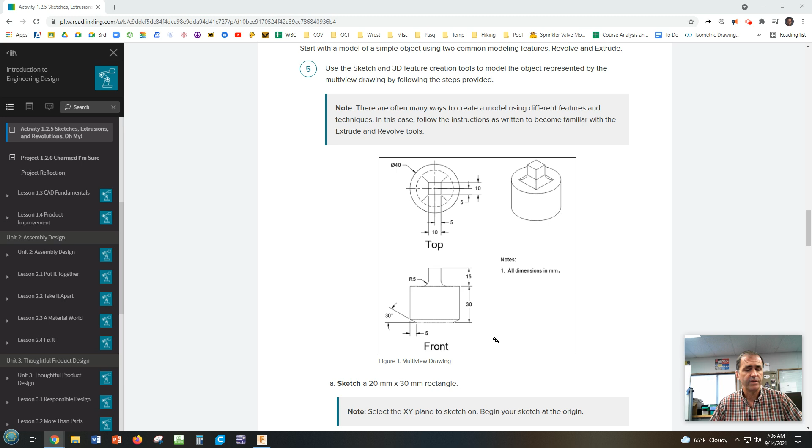All right, here we are in number 5. This is where we will start in activity 1.2.5 in the MyPLTW IED course. So we're going to create this object in Fusion. Now it starts by saying to sketch a 20 millimeter by 30 millimeter rectangle, which might seem odd, but what we're going to do is create this with a revolve, creating basically half of this biggest chunk here to make it.

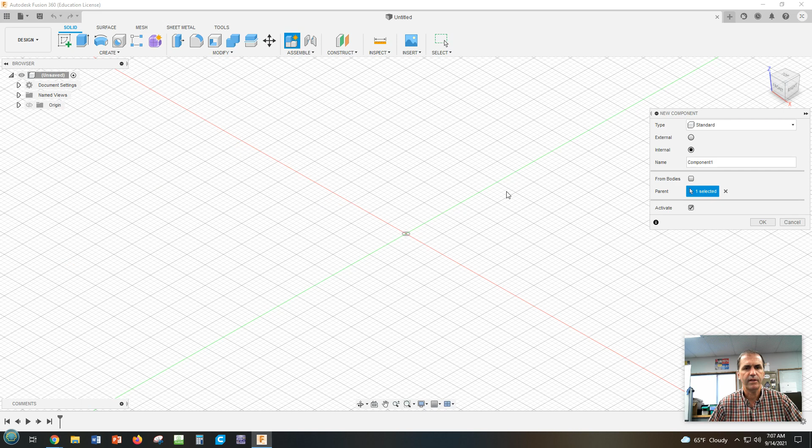Now, as we start this, remember that this video is designed for you to pause and go along with, not try and memorize. Go ahead and get into your Fusion account, make sure that you are in your practice folder, and we're going to create a new component. Just get in the habit of doing that. Click OK over here, and we are now in that environment.

We need to start a sketch. Now, remember this said we want to sketch on the front here, so you can choose either this plane or you can choose, I like clicking on the view cube. And we are now sketching. Now, as long as you do this before you start sketching anything, we can go to document settings. Right now I'm in inches.

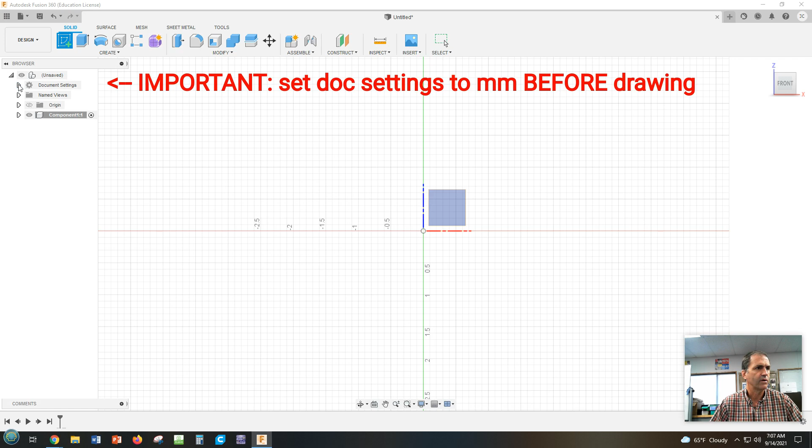I want to set that to millimeters because I believe, let's make sure, yes, that those dimensions are in millimeters. And now we're in our millimeter unit. So we're going to create a 20 by 30. It needs to be 20 high or 20 wide by 30 long, and it'll all become apparent to you soon.

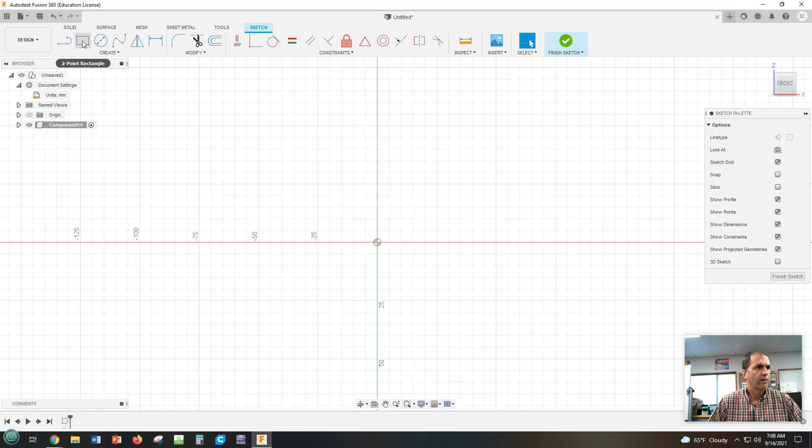2-point rectangle. We're going to hook on to the middle and pull outwards. Okay, so now I want that to be, remember you can tab back and forth. So I want the width to be 20, tab to the other one, and the height to be 30. Now you should have black lines. That means we're hooked up to here and we've defined the shape of this thing.

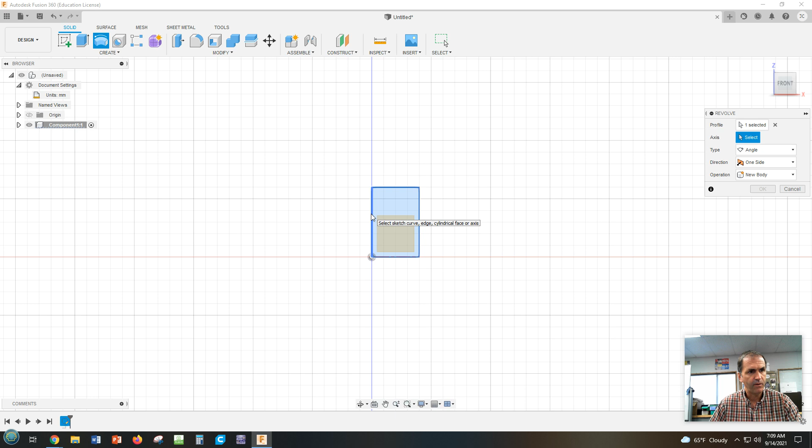Our next step says that we are going to finish the sketch and then revolve the rectangle 360 degrees around the 30 millimeter side. Let's do that. Finish sketch. We're now going to use a different tool. We've been using extrude, we haven't used revolve yet. So revolve is just an extrude that goes around an axis. I'm going to click revolve. We want that shape, it's already highlighted, and we're going to choose this edge right here. And notice that it revolved that shape around the edge. Click OK. Shift button and so on to kind of move it around, take a look at it. So we've got that basic cylinder.

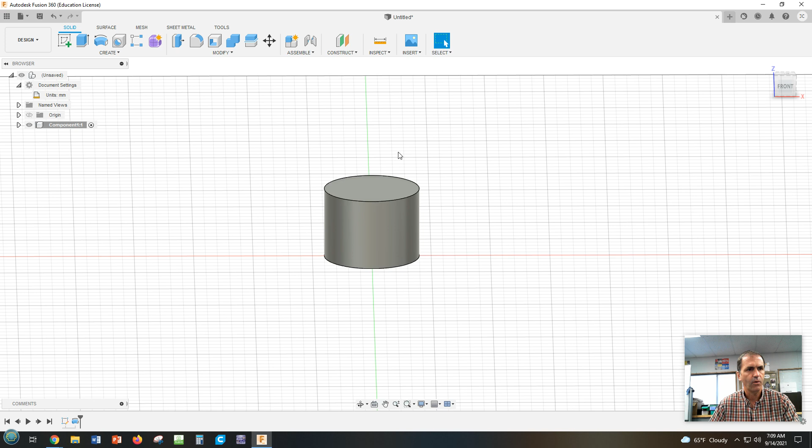All right, next it says to sketch a 10 millimeter square centered on top of the cylinder, finish the sketch, and extrude the square 15 millimeters. So we're going to sketch up here, 2 ways to do it. I can say sketch here, or I can right click here and say make a sketch there. I think I'll right click on that surface and create a sketch, which brings that perpendicular to our vision. And we're going to make a rectangle.

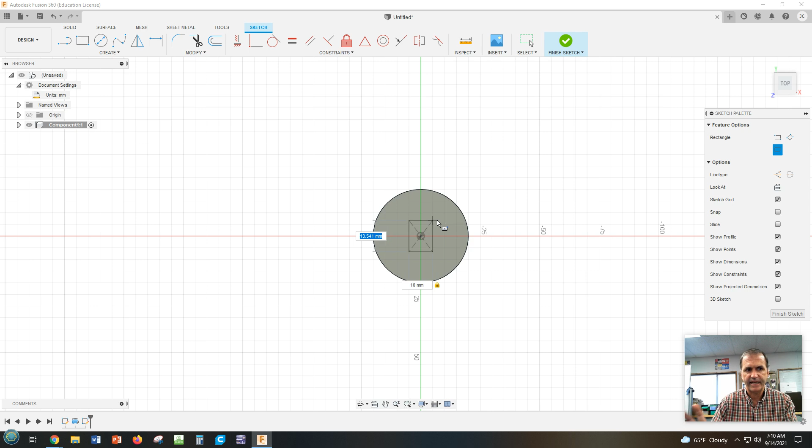Now, this time, rather than corner to corner, I am going to come down here to find different types of rectangles. Notice there's a center one, that's the one I want this time. I'm going to click on the middle, click. Now keep in mind that this same stuff is going to be used next time, but I'm not going to give you a video for it. And it is 10 millimeters, tab 10 millimeters. Now I'm purposely going to accidentally forget to put that next one in and just hit enter.

Whoops, I messed that one up. So you can always go back in and double click on those numbers and change them.

All right, so we are fully defined. We're going to finish that sketch, and the instructions said to extrude that shape to 15 millimeters.

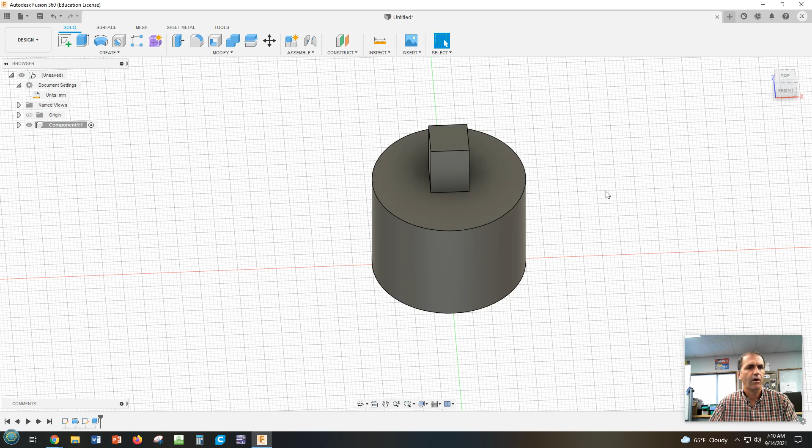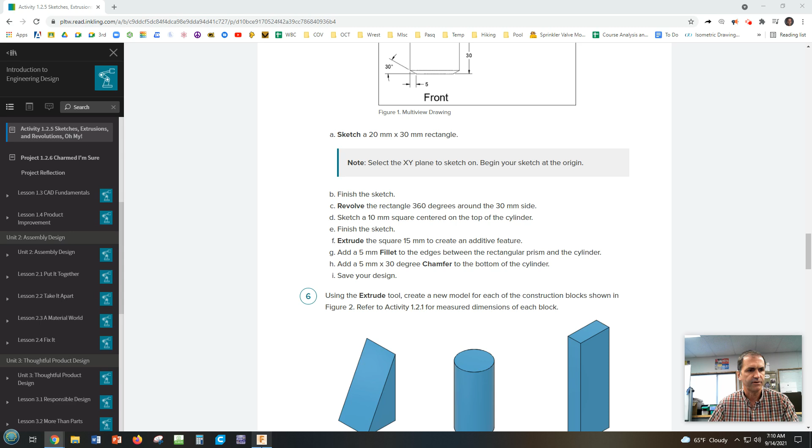All right, two things left to do. Next is we are going to add a 5 millimeter fillet to the edges between the rectangular prism and the cylinder. Let's do that. Fillet has two meanings, and it's not fillet like this is not McDonald's where we're getting a fillet of fish. It's called fillet, which can either round over a sharp corner or fill in an inside corner.

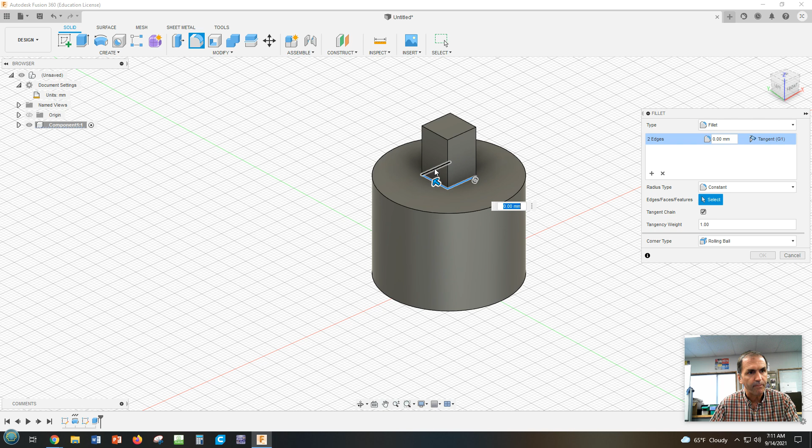So we're filling in on this one. We're going to click fillet up here. We're going to click all four corners. You can actually kind of do a magical see-through on this so you don't have to rotate it around. And it's going to be 5 millimeters. Okay, so now we've got our rounded part.

And the last thing we're going to do is create a chamfer on the bottom. So this says add a 5 by 30 degree chamfer to the bottom of the cylinder. So it's 5 millimeters by 30 degree chamfer. So we're going to do that.

So up here by fillet, there should also be - oh, it's not in the menu, but drop down that modify and we have chamfer. Click on chamfer, okay? We're going to click on this edge down here and it will chamfer it for us.

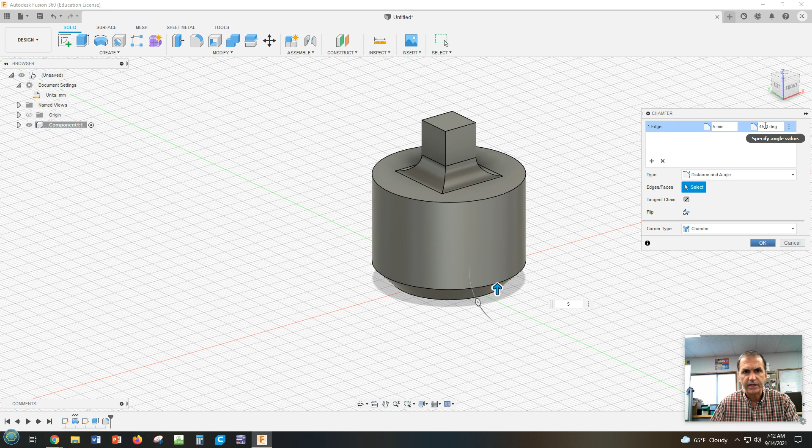Now it doesn't know what we want yet. We're going to have to change our type from equal distance, where we have to set in two distances, to a distance and an angle. That's what we need. So we need a distance of, I believe it was 5 millimeters, and an angle - not 45, but look up here, we're going to change that to 30 degrees.

Now let's take a look at this first. I'm going to go to the front view and make sure that it's right. Actually, I'm going to click OK. I'm going to show you how to deal with this. And take a look at it. Whoops, that went the wrong way. It ended up going 30 degrees the other way and 5 millimeters up.

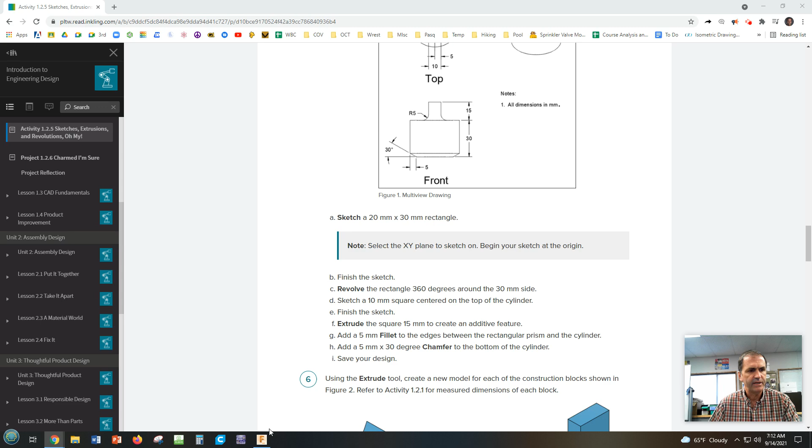So we need to change which way that is. Now, let's not start over, let's just edit that feature. Down here on your timeline, the last thing we did was this chamfer. We can double click on that to edit it. Okay, so rather than redo everything, all we're going to do is say, hey, instead of going the way that we went...

Let's grab this arrow. Oops, that's not the way I wanted to go. There it is - flip. We're going to flip which way it goes. There we go, and now it's going the right way.

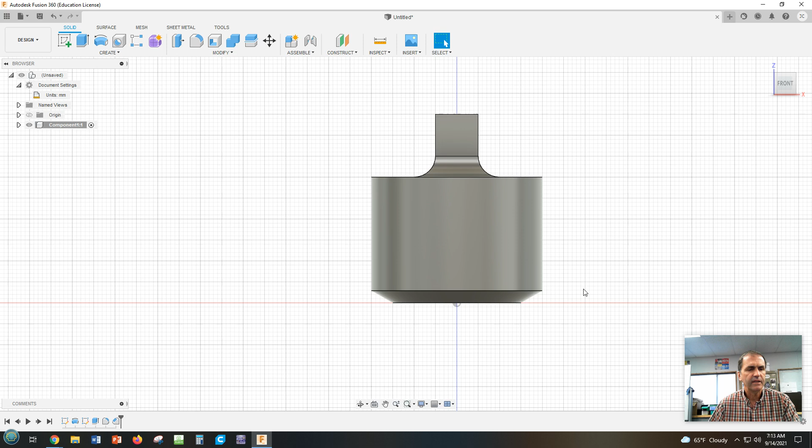Okay, finally, let's - I like to call this the socket - let's go ahead and save this thing as your last name, first initial. Let's call it socket.

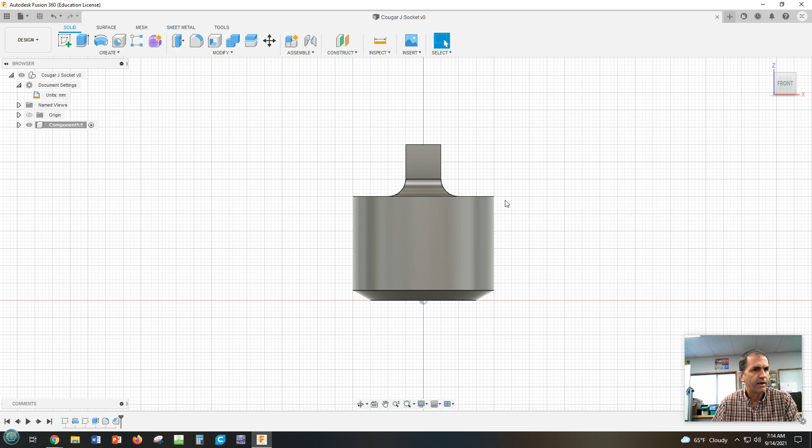Okay, go ahead and kind of drag that over. It should say it right up here, and kind of drag that thing over by here and get a picture of where your name is and this and that object. It'd be nice if you tilted it a little bit too, so we can see that you did the fillets and all that. All right, good job.

Next thing, you'll have to do some things a little bit more on your own.